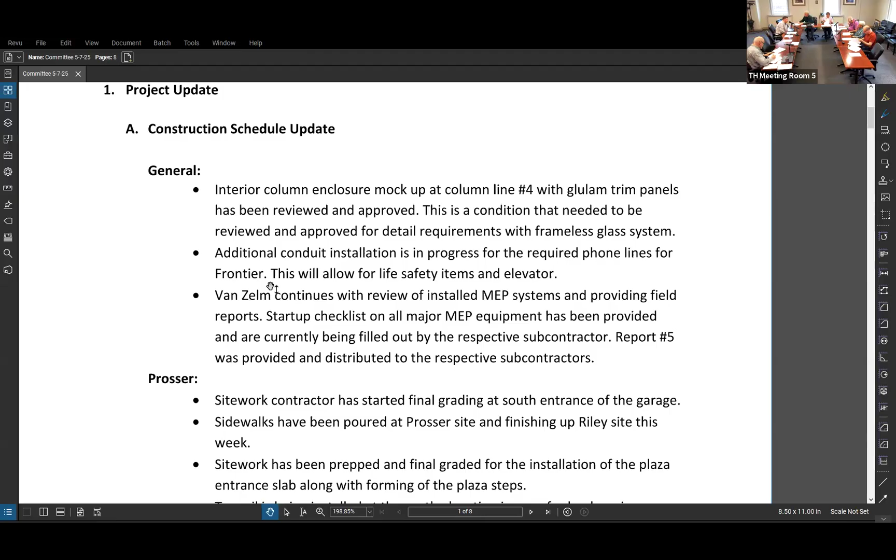Interior column enclosure mock-up at column line 4 with the glulam trim panels has been reviewed and approved. This was a major hurdle - diligent work with TSKP to review the field condition that was created and the detail requirements with the frameless glass system. So thankfully we're in the rear view there and we're proceeding forward.

Additional conduit installation is in progress for the required phone lines from Frontier. We should hopefully have active phone lines next Tuesday.

Van Zelm also continues to review the MEP systems. They were on site twice this week, one doing a review and witnessing the rooftop unit startups today. We have air conditioning within the space that is blowing through ductwork, which is fantastic - that's a huge win for us, a huge milestone. Now we can start really fine-tuning the conditioning of the space now that we have all those interior finishes in and provided.

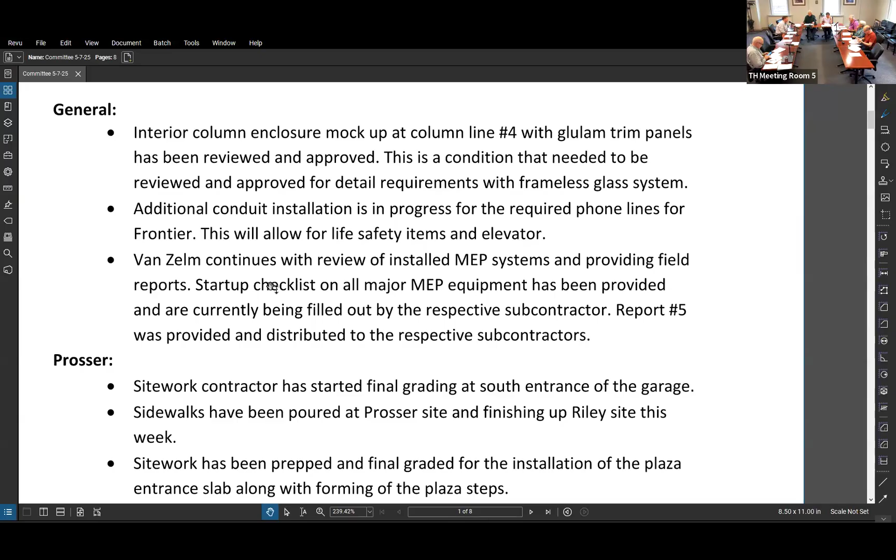Going down the list, the site work contractor has started the final grading at the south entrance. We're working to clear that up with some miscellaneous equipment and material from subcontractors. Now that it's cleaned up, you'll really start to see Manafort take shape of that south side area down below. We have poured...

Sidewalks have been poured at the Prosser site. We are finishing up the Riley site as we speak. Those got held up at the beginning of the week with the monsoon rain that we had for basically 5 days, so we're on it. They're working on it, and they should have that all completed by the end of the week.

We have our site work prepped and final graded for the installation of the plaza entrance slab, along with the forming of the plaza steps. They have demoed the plaza steps that weren't up to par, that had quality control issues, so we are correcting that, and we are in the process of having Manafort take care of that work.

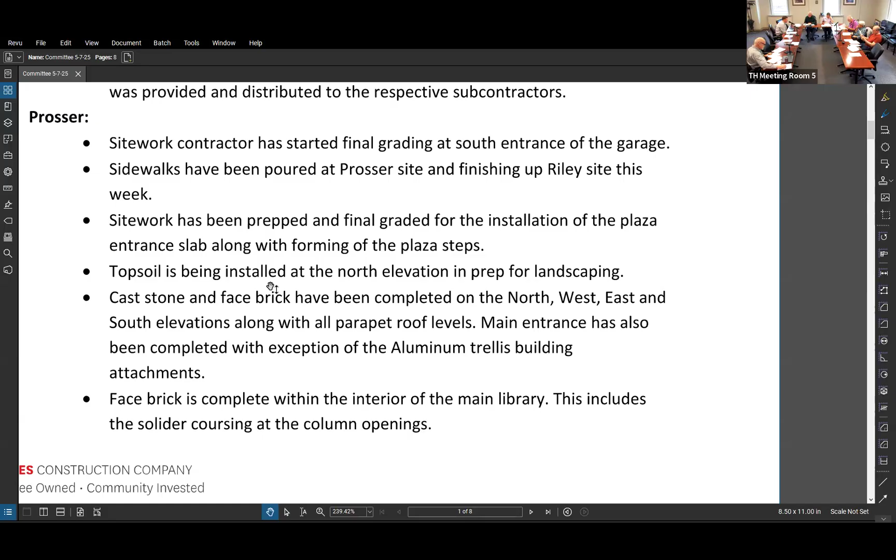Topsoil, as you can see, is being spread and installed on the north elevation on the Prosser site, as well as around the back side of the Riley lot. Cast stone and face brick is all pretty much wrapped up and completed, with a couple of infill patches that we need to do once that aluminum trellis goes up above in the main lobby area. We left some brick out so we can make the proper structural attachments to the building steel.

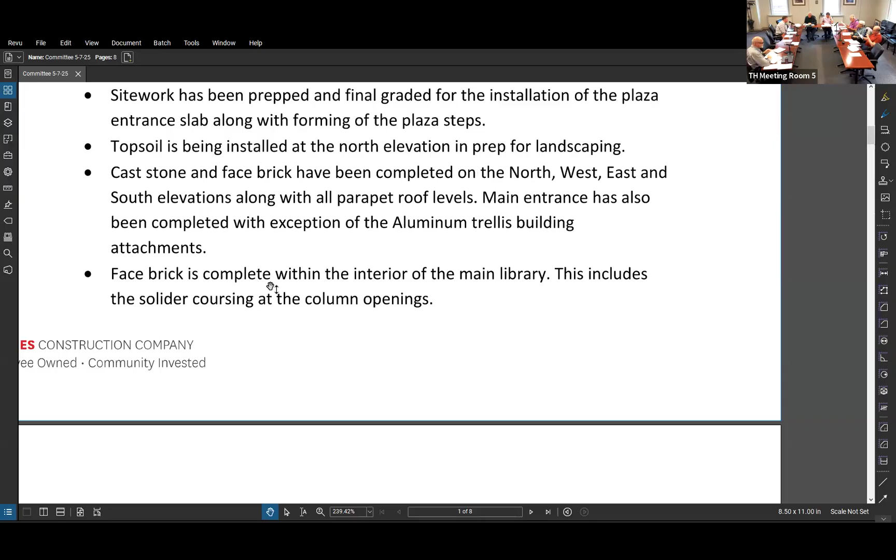Face brick is all completed within the interior of the main library. This includes all the soldier coursing, has been cleaned up. The stonework is continuing at the plaza retaining wall.

Connecticut Mason has done a hell of a job for us on there. It looks absolutely stunning. They have been working underneath the tarp system to keep the rain from hindering their work and progress, but that should be all completed by the end of this week.

The porch guardrail system on the second level has been installed. The IPE decking has been installed on the porch. We have a couple more pieces to go to take us to the end, but significant progress was made there.

The floor mitigation and the finished flooring have been installed on the second level. Floor protection is continuing to be applied and reviewed for deteriorating conditions on the second level. We do have our flooring subcontractor moving down to the main level this Friday.

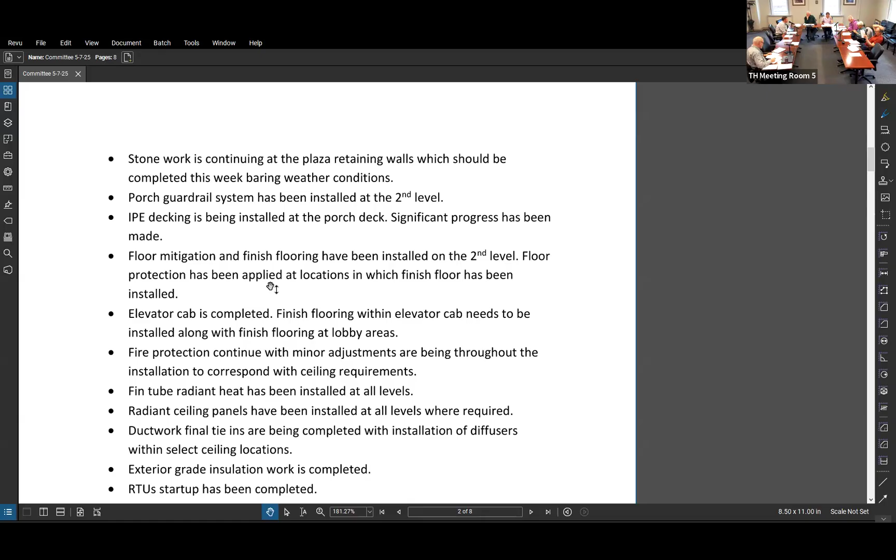Elevator cab is complete. Finished flooring we need to complete within the elevator cab, as well as any finished flooring within the lobby areas. But right now, we're hoping to get Otis back out there on Tuesday and a potential elevator inspection. Fire protection continued with minor adjustments as we continue to close out ceilings and install ceiling grid.

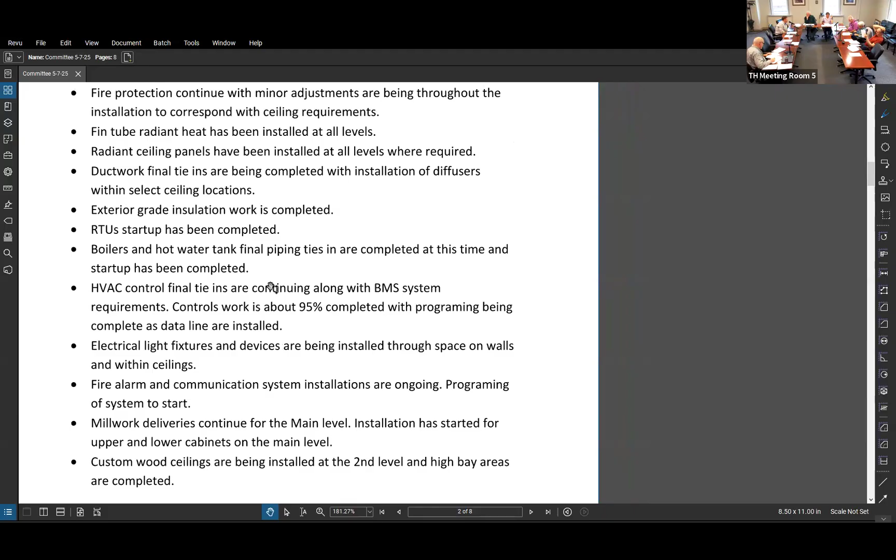Fin tube radiant heat has been installed at all levels. Radiant ceiling panels, again, have been installed at all levels. Ductwork final tie-ins are being completed with the installation of diffusers within those ceiling grids and those final ceilings, as well as that linear diffuser that's going on the 4-line within the main library space.

Exterior grade insulation at the mechanical area is completed. The RTUs, like I mentioned before, have been started up today. That startup has been complete, which is great. The boilers and hot water tank, that's all completed and has been started up.

HVAC controls and final tie-ins are continuing with the BMS systems. We're about 95% complete with programming being complete as the data and phone lines are up and running.

Electrical light fixtures and devices are continuing throughout the space within ceiling grid and ceiling tiles as well as walls. Same goes with fire alarm, and the communication systems are ongoing. Programming is to start shortly on that once we get the phone lines in next week.

Millwork deliveries are continuing for the main level. We have started the installation of upper and lower cabinets throughout the main space where we can.

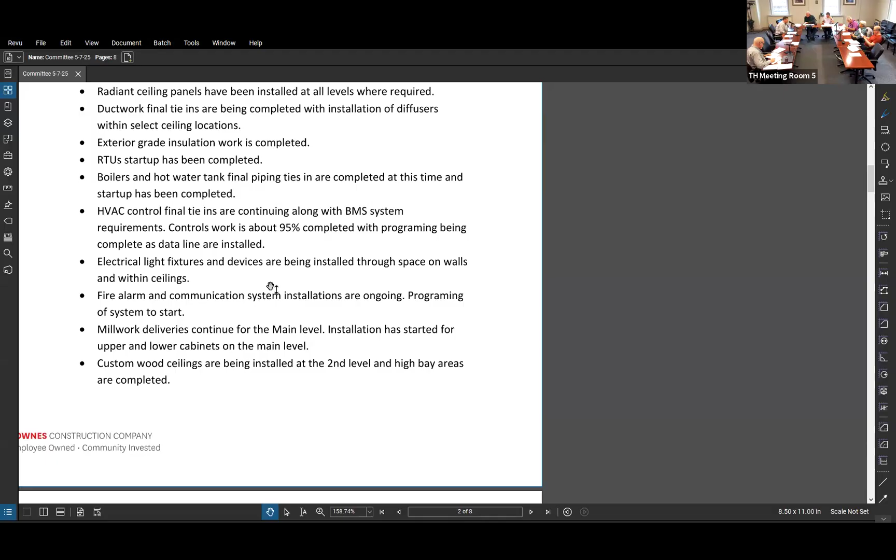Custom wood ceilings have been installed at the second level in high bay areas. That has all been completed now that we have all the glulam trim panels up, and all the structural supports that were required to hold those pieces have been installed and completed. Those were third-party engineered. There were no safety concerns or any structural issues hanging a 34-foot long, 1,000-pound piece of glulam trim panel.

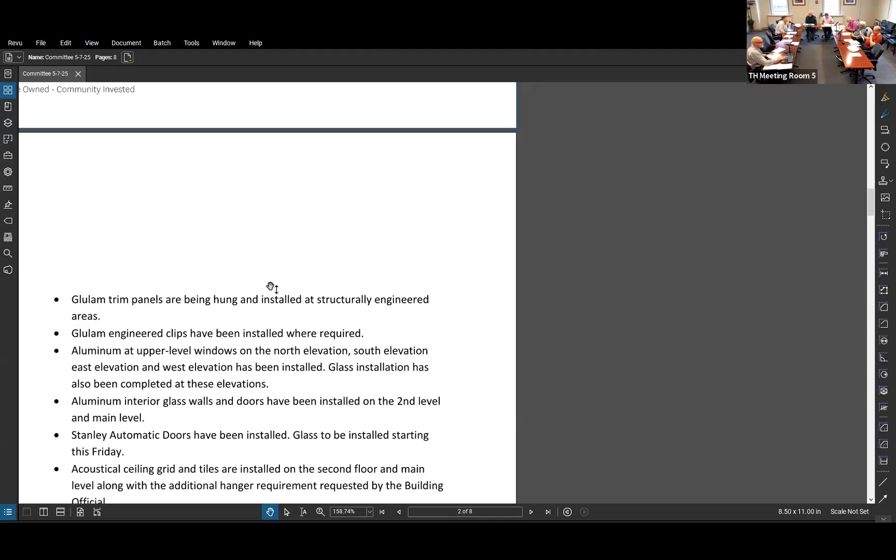Aluminum at the upper level, windows in the north, south, east, west elevations has all been installed. Glass installation is pretty much complete at all of these elevations.

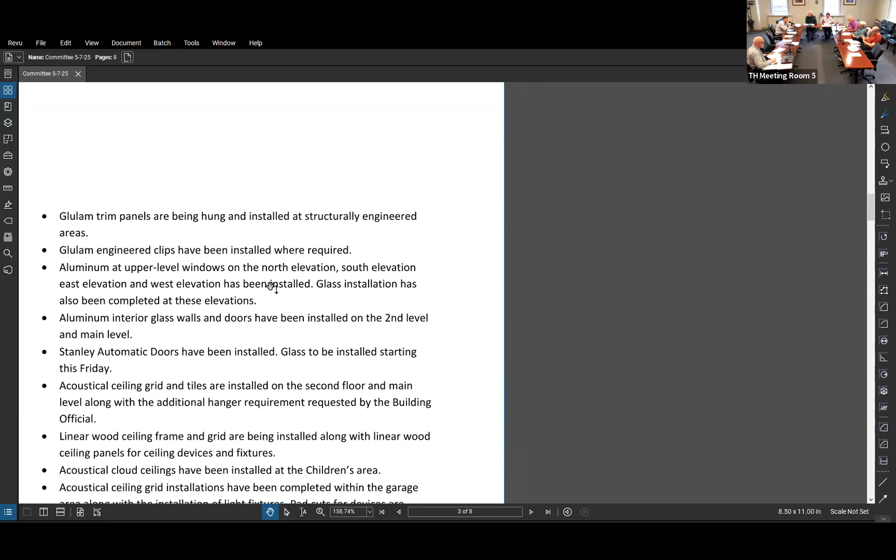Aluminum interior glass walls and doors have been installed on the second level. Stanley automatic doors have been installed. Glass is to install Friday. Acoustical ceiling grid and tiles again are installed on the second floor with main level.

Additional hanger requirements that were requested by the building official have also been completed, so we are able to get above ceiling inspections done on the main level, and the ceiling is padded out.

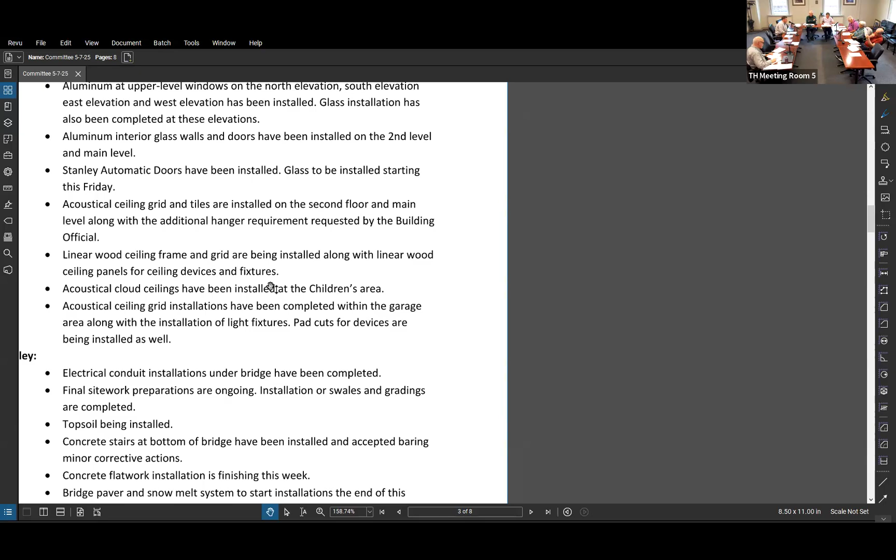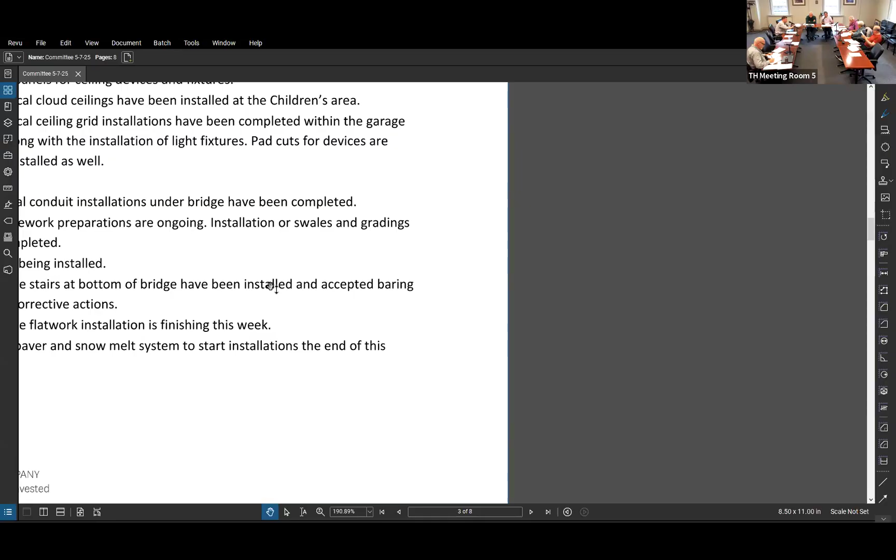What's going to happen? They will be financially responsible for that repair work.

100%. Okay, so how does that work? Does it come off of what we pay to them? Yeah, it will come off what I have in my bank account. Okay, that does not go back to them.

Okay, because I need to take that money and pay Manafort for the deficiency, let's call it.

Okay, so we already know what the cost of those steps are? Correct, and it's all tracked, itemized, time and material, so there's no price gouging. It's a fair price. We track the time, the hours, the material, the equipment, and the labor for it.

Wonderful. Okay, thank you for that.

The other question is the shelf, or the counter, that's out on the porch. There were some concerns about what was going to be on there. I believe that was one of the items we reviewed with TSKP. Jeff was a great help to us the other day, on site for a good half a day working out some minor issues and some major issues for details, making sure we get everybody on the same page. But we are proceeding right now per the base contract. If they want to require any supplemental steel, it will be added. With the design team and talking to Jeff and everybody, we feel comfortable that the way it's laid out should suffice.

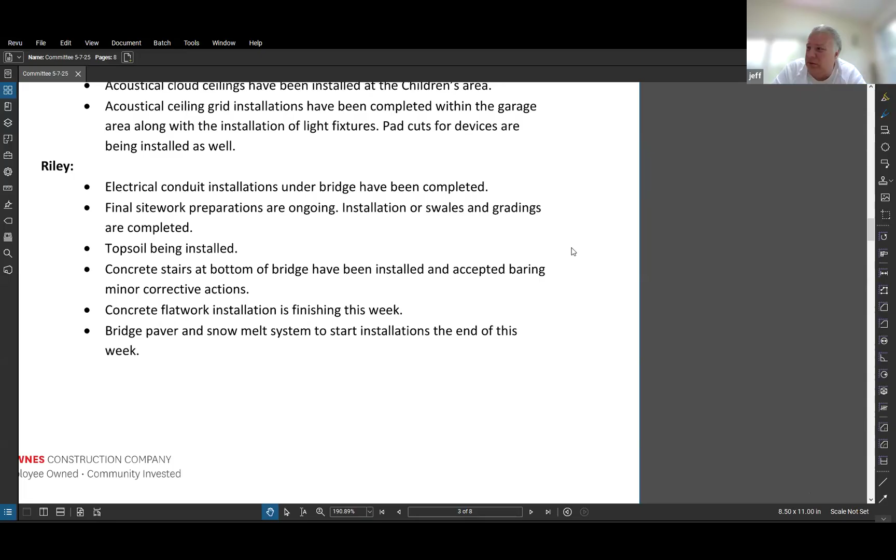What shelf is this? This is the countertop on the porch, the ipe. Jeff and Taisu were there too, and we resolved some things as far as the spacing, where the splice joints are, and the attachment concealed from underneath. There's one loose end: Taisu seems to want it to be a single piece somehow in look, but we were told, and it's probably true, that you can't get ipe that wide. So we're looking at a possible splice or a dado, a rabbet joint, so the two pieces can come together. That's in further discussion. There are still things I'll have to issue to Anthony so we can get on the same page with the sub.

Just to interrupt -- the concern was some tradesperson questioned the structural stability of that counter. Oh, no, that's definitely rigid, and that was the issue. So all the details you're talking about are business as usual, just laying out the wood and detailing and all that. Yes, okay, thank you. That was it, Anthony. Thank you.

All right, good clarification, Mark. Other questions for Anthony or Clark?

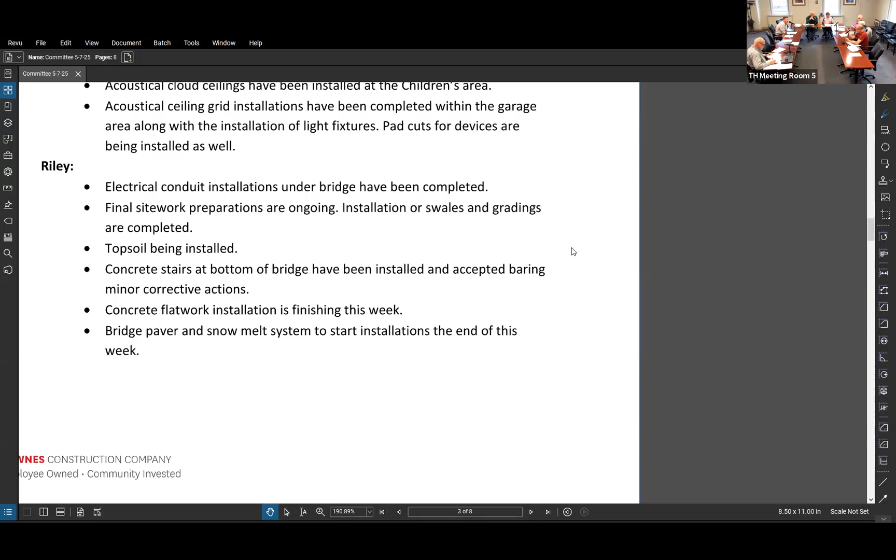In the middle of page 2, I didn't understand the remark, exterior grade insulation work is completed, and you mentioned something about RTU. That is all the ductwork insulation on the exterior of the building that gets a special exterior grade duct wrap insulation. That has been completed.

On the next page, why did the building official want additional hangers for the ceiling? He wanted additional hangers for the diffusers. He came in a couple weeks ago requiring us to hang the diffusers due to the load it would enforce on the ceiling grid itself. So in order for us to pass above-ceiling inspections, he required us to tie the diffusers up to the structural portion of the building, rather than the grid holding it.

Okay, thank you. Apparently he has invoked a code that is yet to come upon us, but we did not argue the fact. We're thankful to be on the cutting edge of building codes -- of what's safe. Absolutely, front runners.

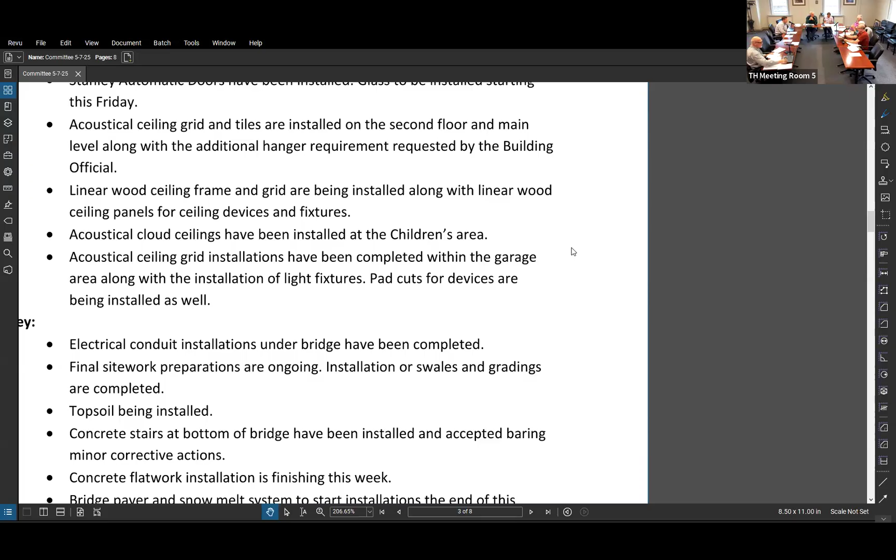So are we ready for the solar as soon as the solar is ready for us? When we get the C of O, we'll be ready for the solar. But all the provisions are in place for it -- we have empty conduit to the roof. And it's now in the town's hands, correct? Thank you. Other questions for Anthony on Prosser?

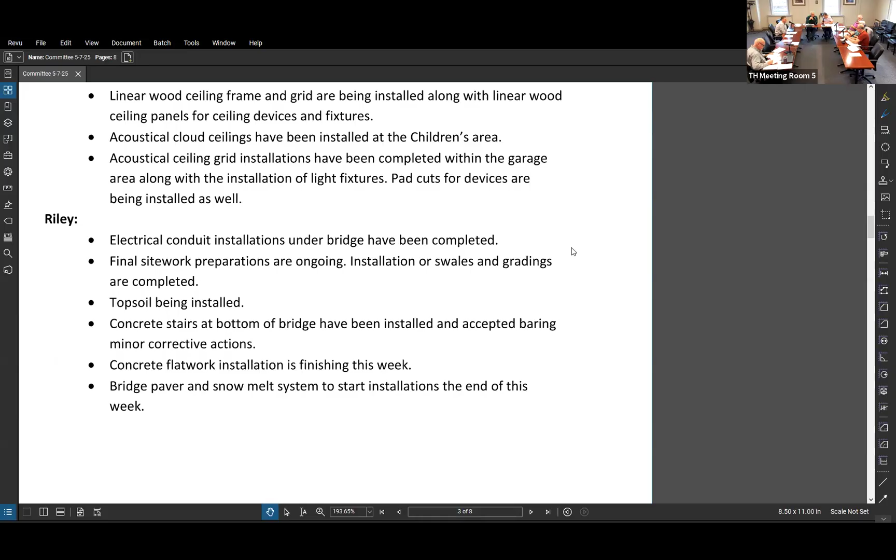Anybody out there? I can't see hands, so if you have a question, just -- no hands. No hands. Okay.

All right, moving on to the Riley lot. Electrical conduit has been completed under the bridge. Final site work prep is ongoing. Installation of the swales and gradings is completed. Topsoil is being installed. The concrete stairs at the bottom of the bridge have been installed and accepted, barring some minor corrective actions that we have documented. The concrete flat work installations will be finishing by the end of this week -- we got a little delayed because of the rain, like I said before. The bridge pavers and snow melt system are set to start installation on the bridge by the end of this week.

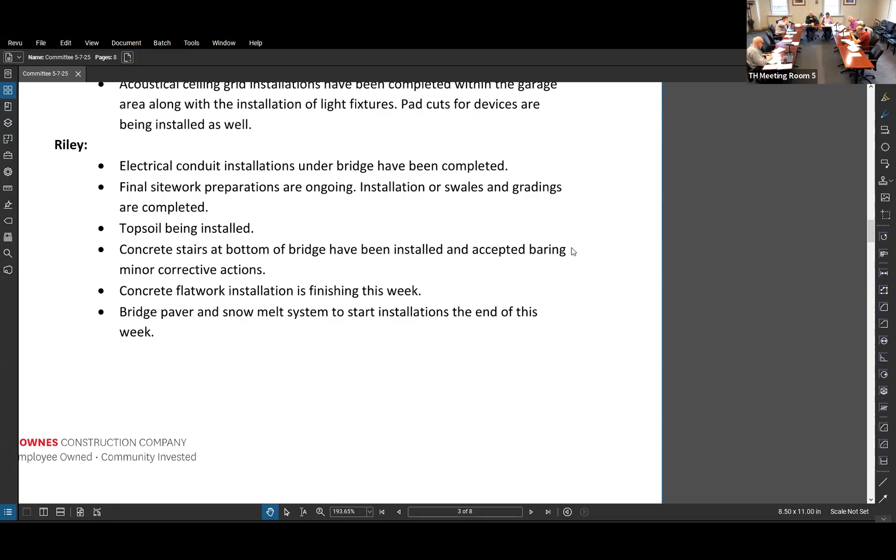Do you have any questions on the Riley lot? Yes, Patrick. Thank you, Chair.

So I just wanted to know, with all this rain, have you noticed how high Washbrook is at this point? It got up pretty high -- it hasn't breached anything yet, but it got up pretty high, probably the highest I've seen it since I've been on this project for the last 18 months or so. Okay, but nothing has breached. Nothing. Okay.

The swale that Manafort installed on the Riley lot underneath the bridge filled up with water like it was supposed to. Scott, I think some of those flooding concerns may have also been from existing drainage getting into it and bubbling up into the parking lot too. Never mind if it flooded its banks, with your new design it should be okay.

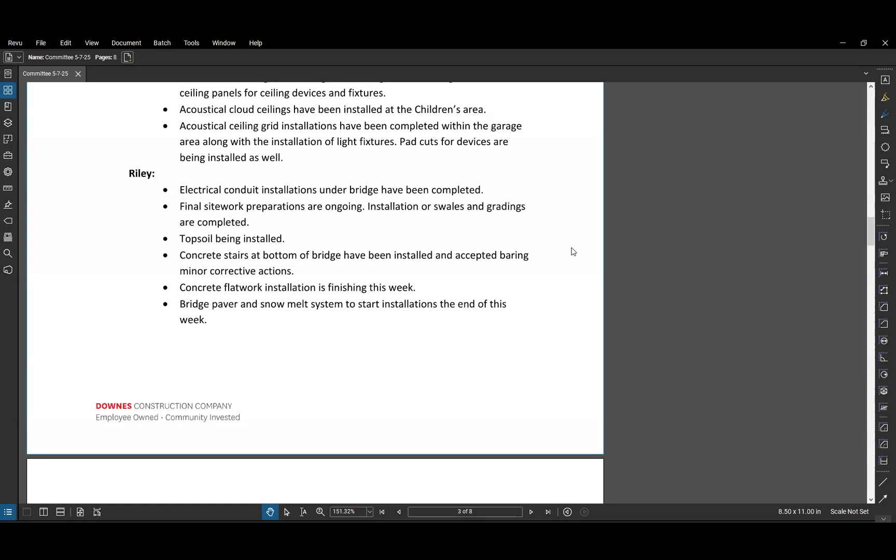That's good to know. With what you did with Riley to have water go to the very back into the swale, that's now good. You have a garage on the first floor now, so if water gets in there it's not a big deal. We don't want any of that, but understood, we have a garage, but we have the Friends there too.

No, the Friends are elevated above the level of the garage. You walk up three steps to the entrance. The only thing at the lowest level are the parking spaces. Those parking spaces are higher than they used to be too.

Correct. So then the last thing, Anthony, I noticed the growth along the banks of the water, and it's all that garbagey ugly weed stuff. Is there any progress? Right now we do have a PR that TSKP and Richter Cegan put together for us to mechanically remove that.

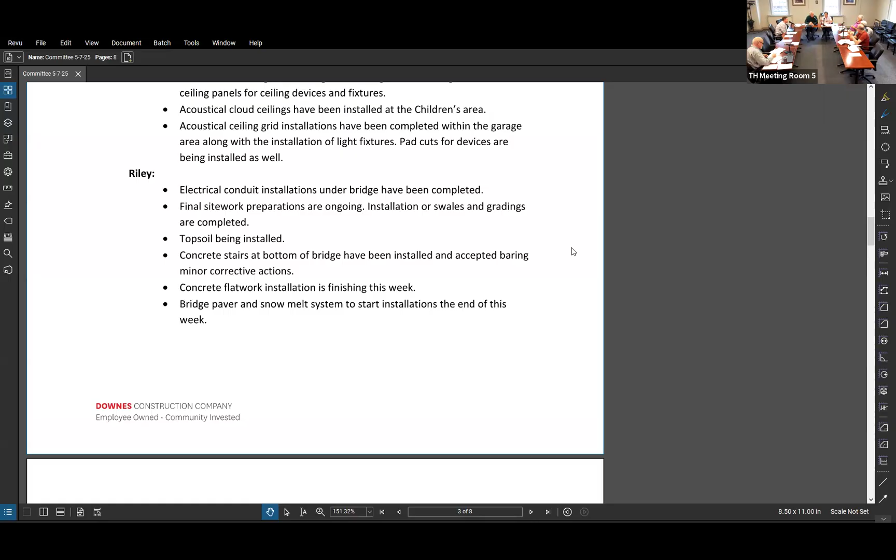I have a price from Manafort. I just need a credit price coming in from EDI, and that's one of those items you'll see on my budgeted PCO list that we want to get approved probably at the next committee meeting, once I solidify a credit coming back from EDI. In the meantime, Manafort is making provisions to take care of that work while we wait. The contractors owe us clearing and grubbing to some extent along the brook, so that'll be contrasted with complete mechanical removal of what's there.

Other questions? Mr. Berman? Thank you, Chair. Just one question, Anthony. I presume the trailer is out, or is coming out, from Riley? Sad to see it go, but it's out of there on Friday.

Okay, and then they're going to be putting the final layer of paving down? Yep, probably sometime by the end of May.

That's going to make it interesting for owners' meetings going forward. Oh, we'll get the nice plastic chairs and the fold-out tables ready to go. We'll let everybody know where the meeting is, and maybe let you know too, Bob. Thank you, okay. Oh, I heard about that.

Driving by the other day, I saw that they were again digging in the street. Can you tell me what that was about? Was that another unexpected event? Nope, that's a final sewer tie-in, that's it, simple. Sounds good. Yep, they made quick work of that. They're out now and we're putting some sidewalk down.

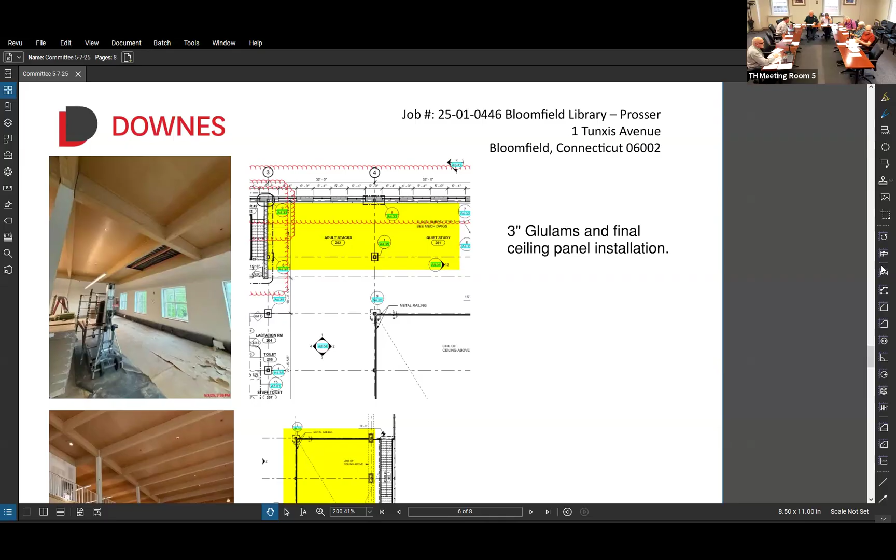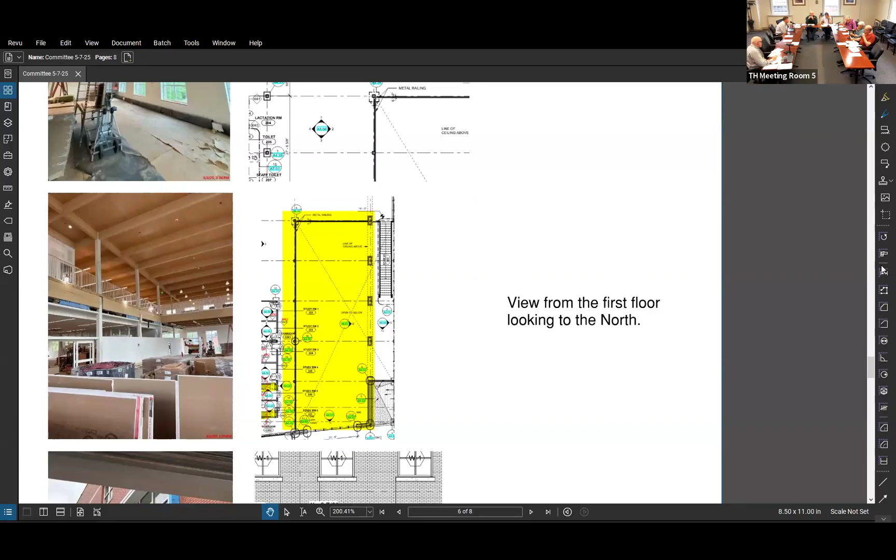Going down the list here, here's a view from the first floor looking to the north. As you can see, the light fixtures are in, the wood beams, the panels. You could see the glulam trim right above those linear diffusers on the 4 line that we got installed with the structural clips that were needed along that whole line. That was that big milestone that we hit working with TSKP to make sure we hammer out the correct details in this location, which we passed.

Outside, you have the window metal progress on the west elevation at the bump outs. You could see all the fascias, soffit, and the roof components are done as we started the brake metal going up the jamb side, as well as the fins going up on that west elevation.

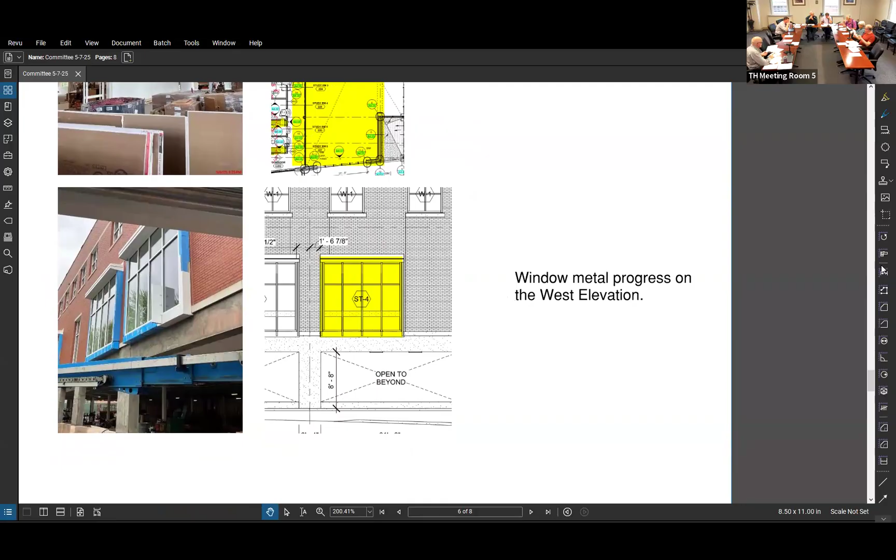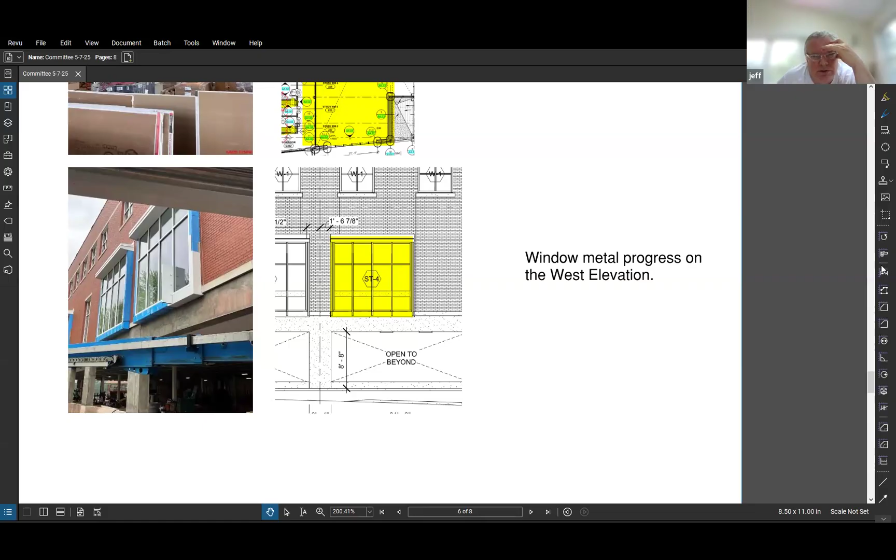Those windows we're looking at there will receive the vertical sun shades like the east side will, right? Little different look, I think. Correct me if I'm wrong, Jeff. Very similar, they just attach as an extrusion to the curtain wall system, whereas the east side are part of an exoskeleton system, but they're doing the same thing.

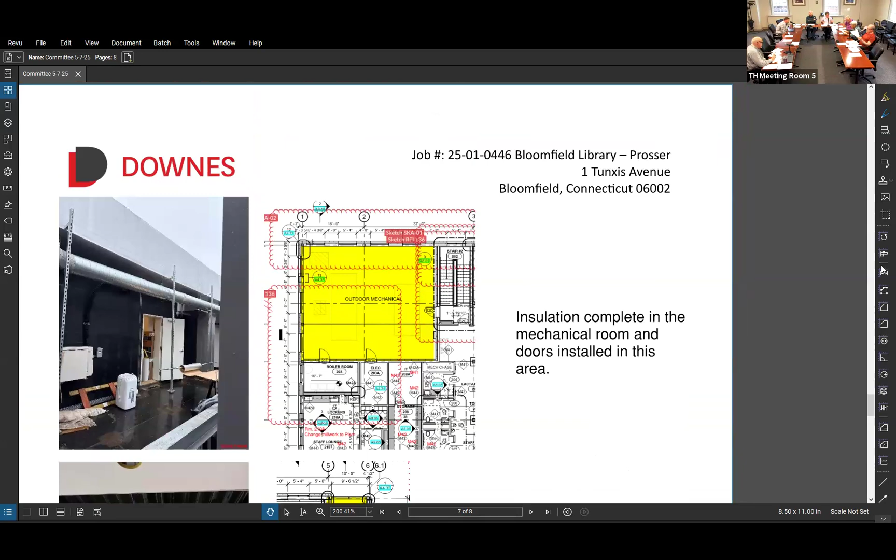Beautiful, all right, let's keep moving. We have here the insulation, like I said before, on the mechanical room. Outdoor mechanical room has been installed and cleaned up. Rooftop units are up and running.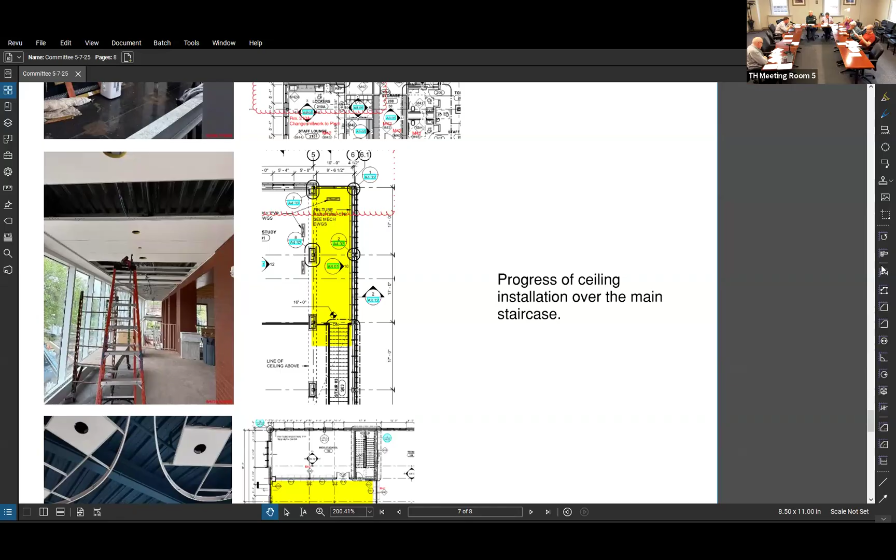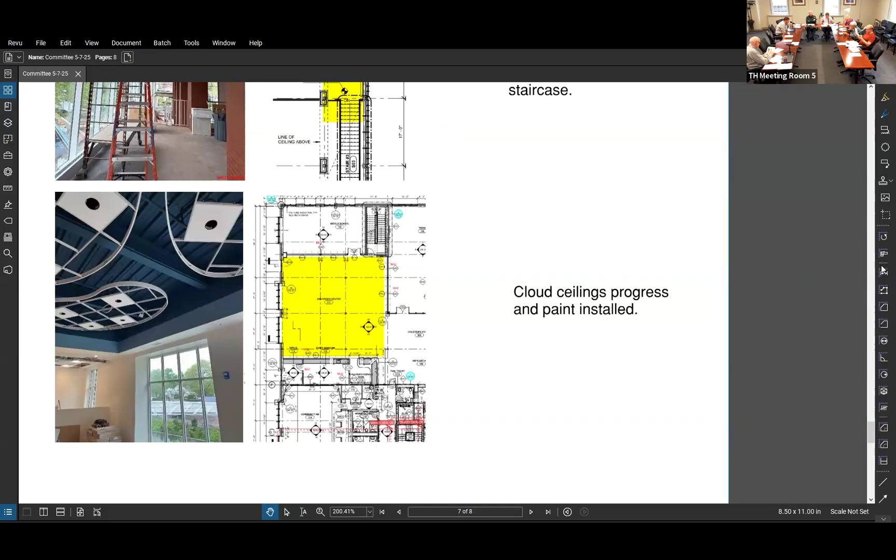You can see the progress of the ceiling here at the monumental stair looking down that east elevation. Those are the bigger, larger acoustical panels and the grid ceiling going in. Here you have the children's area with the cloud ceilings, like we talked about, the islands going up. This picture doesn't do it justice - you go out there and it looks absolutely stunning to see the contrast of the dark blue and the white cloud system.

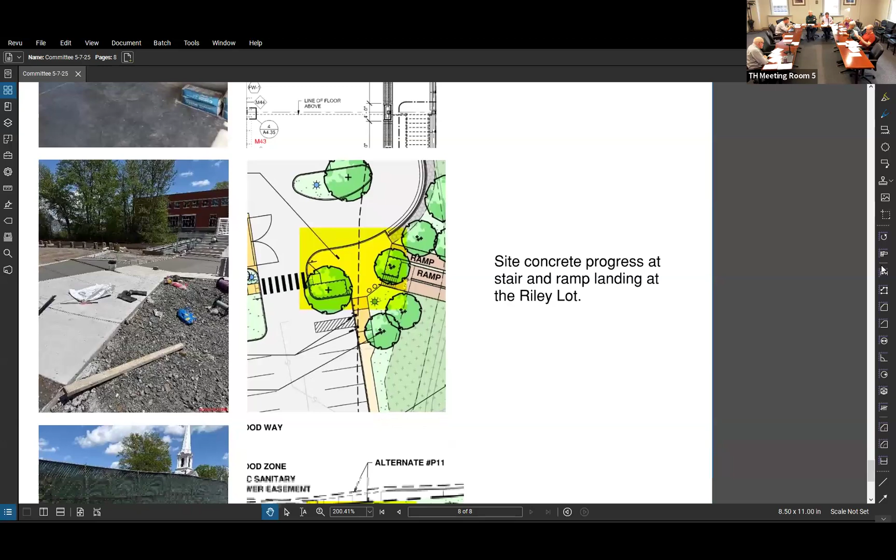Fireplace on the lower level. And like I talked about before, we have the concrete stairs in, flat work and sidewalks being poured on the Riley lot. And this is the topsoil being installed at the north side of the property. That kind of takes us to the end. Anybody have any questions?

No questions for Anthony? Lois - Anthony, is the fireplace gas flame? No, it's electric. Good.

Patrick - thank you, Chair. Anthony, I just wanted to know the POs that we approved that had amounts to them, are they already considered in the contingency? Correct. Okay, yes, yep, thank you.

Other questions for Anthony before we let him go? Yep, this is Jesse - I was just wondering, is the fireplace operational or is it just aesthetic? I believe the type of fireplace was quite expensive, but it is electric, Jesse. It does produce some heat. It's not like a wood stove type of thing, but yes, you'll be able to sit by it and hopefully feel a little warmth coming out. That's the plan, I appreciate it. Right on, we'll have a coffee. Awesome.

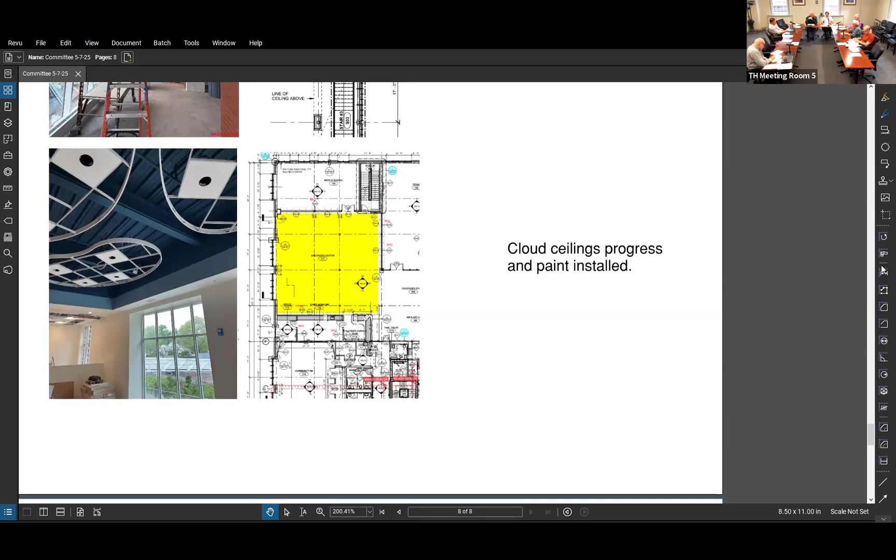Next, we've got Glenn. Oh, Glenn's not with us - he was unable to make it, too many other town meetings. He asked me to present a couple things for him. Okay, very good.

Okay, the first thing that Glenn asked that I bring up for him is the lawn restoration quotation. His folks will be doing the actual work, so there's no labor, it's just for materials. For a total of $795.87, and that's the entire lawn area of McMahon-Wittenberry.

So moved. All right, we have a motion to approve by Mr. Ike, seconded by Mr. Berman. Questions, Mr. Berman? Thank you, Chair - just one quick question, this takes care of restoring the lawn not only around the building, but in the front as well? Yes. Thank you. Other questions? All right, all in favor of approving the lawn restoration quote in the amount of $795.87, please say aye. Aye. Aye. Aye.

Any nays? Anybody abstaining? Motion passes. Thank you. And you got something else too, right?

I had one other thing from him, an invoice from Bartholomew Company for the McMahon Wittenberry mechanical roller shades and window tinting for the children's and adult reading areas. This was based on the quote we had gotten some time ago and approved, for a total of $8,897.78. The installation is complete. So moved.